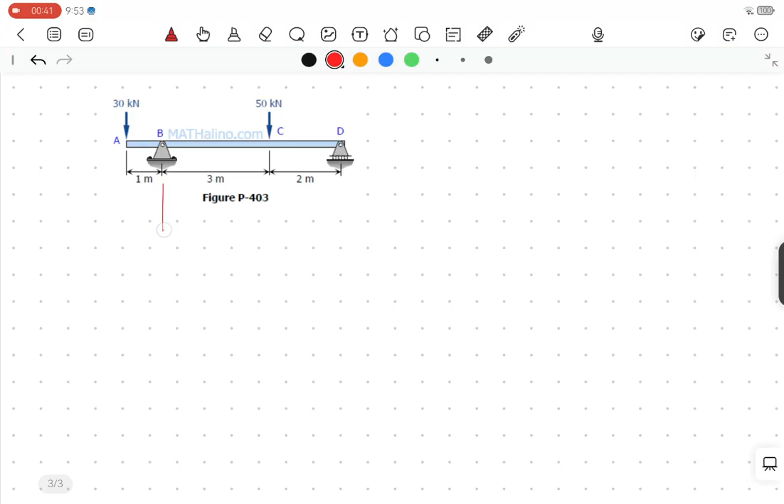First things first, what you need to do is identify the reactions. So there are reactions here and here. Let's call this RB, and let's call this RD.

I'll solve this in the easiest way possible. First, let's identify the loads, and the reactions. We need the summation of moment. You can choose either at B or at D. Let's try it at B. Moment at B.

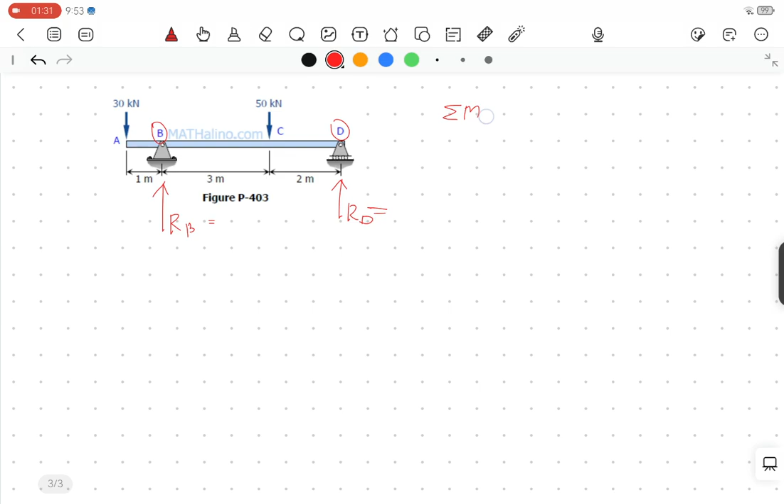I know you can take the moment anywhere, but here we'll just work through it. So moment at B. First, let's make an assumption that upward is positive and clockwise is positive.

Tip for you, if you're confused, always use this assumption. Even if the assumption turns out wrong, the answer will come out negative. So if the answer is negative, your assumption is wrong, and you just change it — no big deal.

Starting from A, the 30 has a moment arm of 1, and it will rotate at B. So it is counterclockwise, and since clockwise is positive, it is negative 30 times the moment arm, which is perpendicular to 30, which is 1 meter.

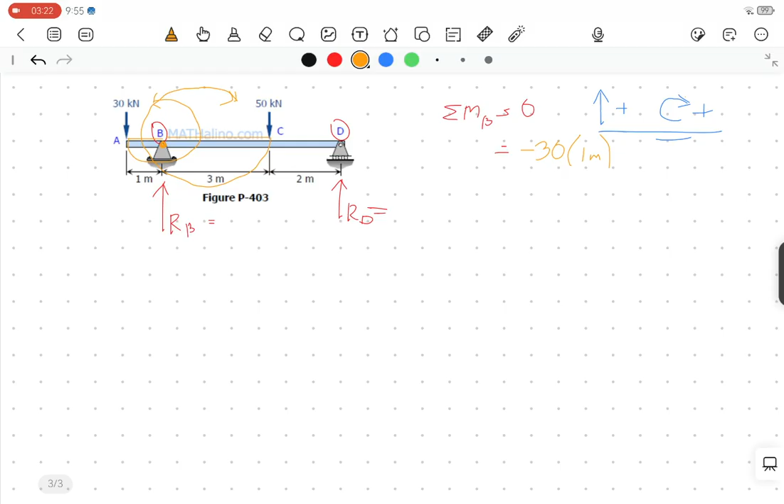Next is 50. Its moment arm, and the 50k will rotate here at B. Since we're taking the moment at B, it will rotate in that direction, which is positive. So positive 50 times 3.

Next, the one that will rotate is this, the RD. It will still rotate at B. So RD will rotate here, and it is in the counterclockwise direction, so it is negative RD times the moment arm, which is 3 plus 2, that is 5 — the length from D to B.

So solve for RD, which equals — you can solve this on your calculators in case I make a mistake — negative 30 times 1 plus 50 times 3 minus RD times 5 equals 0. It's 24.

So RD is 24. Next is summation of forces. Since only RB is left unknown, and all the vertical forces are given, we'll use summation of forces. We could use summation of moment, but for the easiest way, let's use summation of vertical forces.

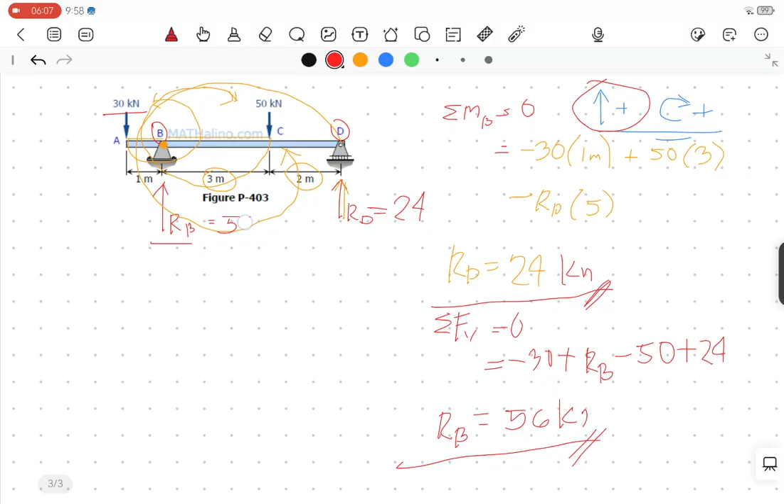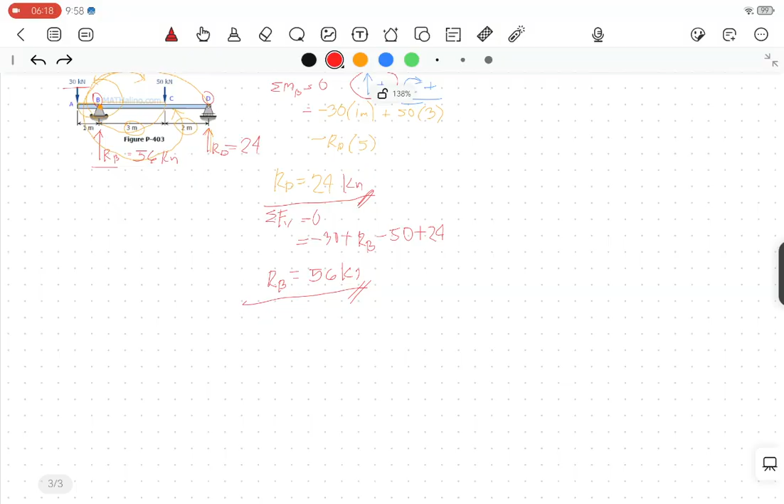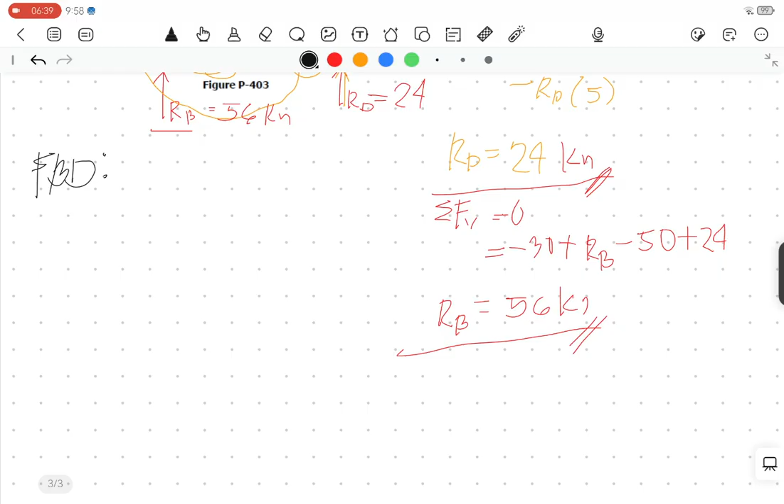So second, let's draw the — what do you call it — the FBD, the free body diagram. Our diagram will be quick and easy.

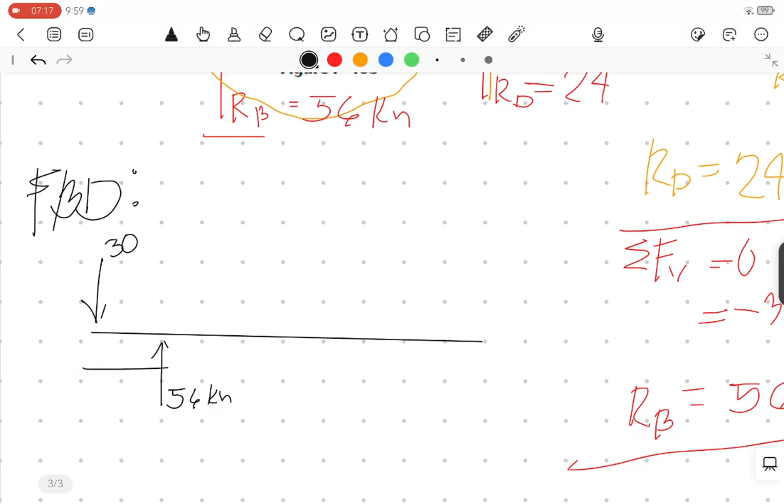So here we have 30 kN, and there's RB, which is 56, at 1 meter. Then there's 50 kN here, and the distance from here — we know it's 3 meters — and there's 24.

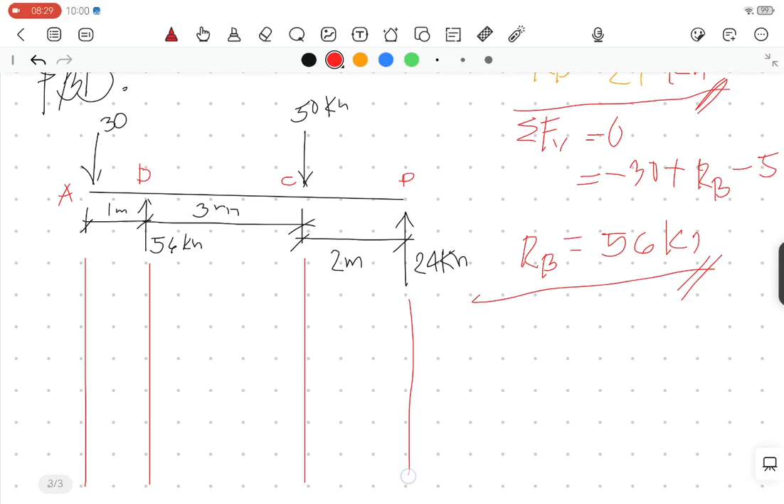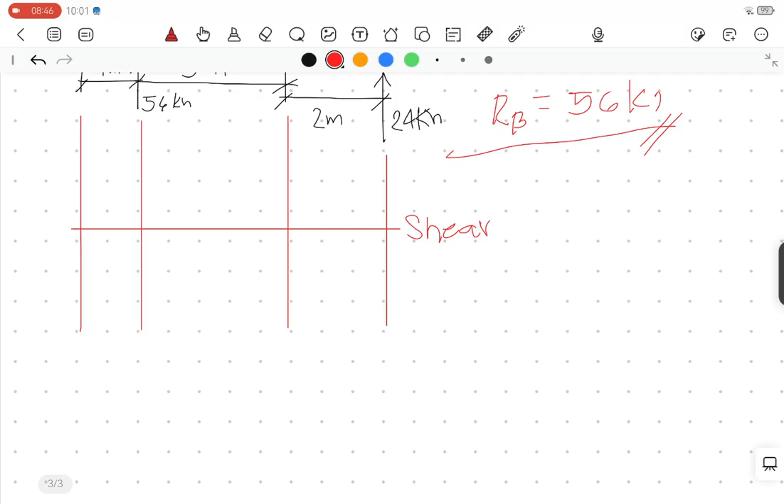Let's try this shear. Let's put here, solving for shear.

So here I'll explain the easiest way so it's easy to understand. So shear, or I call it V so I don't get confused, since it's vertical.

So VA, from left, I call that VA from left. If you draw a shear moment diagram, always look at your left. Look always at your left. Right? This is A. So left of this A, the left of this A.

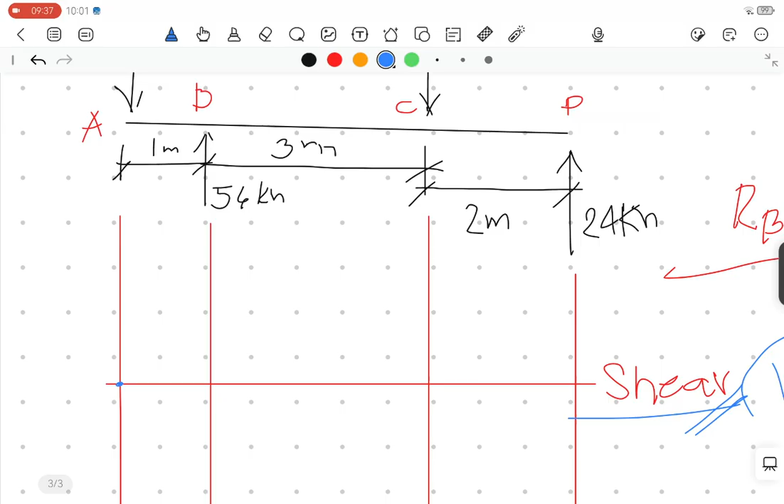Look here. If there are vertical forces. Are there vertical forces? None. So that's 0.

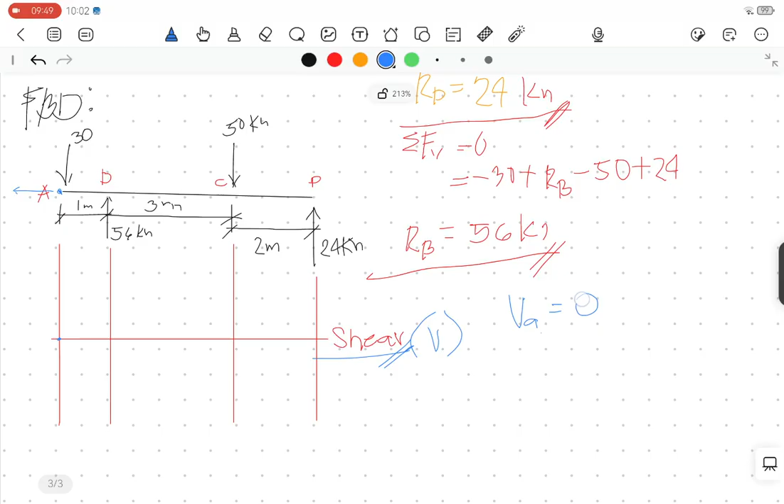So VA again. Look here, right there. Look at that. So now ask yourself then if there is a force acting. There is, which is 30.

But in downward position. What's our assumption? Upward positive. Guys, your assumption for the reaction must be the same as your assumption for your shear. So here it's negative 30.

So let's draw. So VA is 0, right? So we place VA as 0 first. Next is 30 downward. Your VA is 30. So here 30, which is negative 30. Then of course we draw.

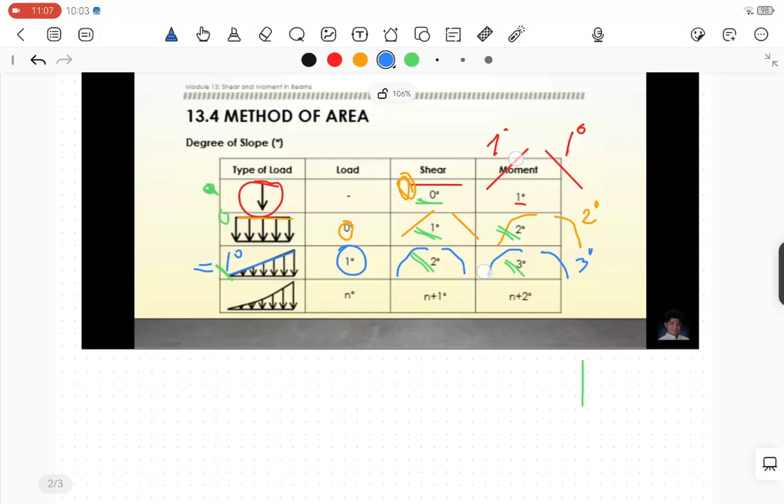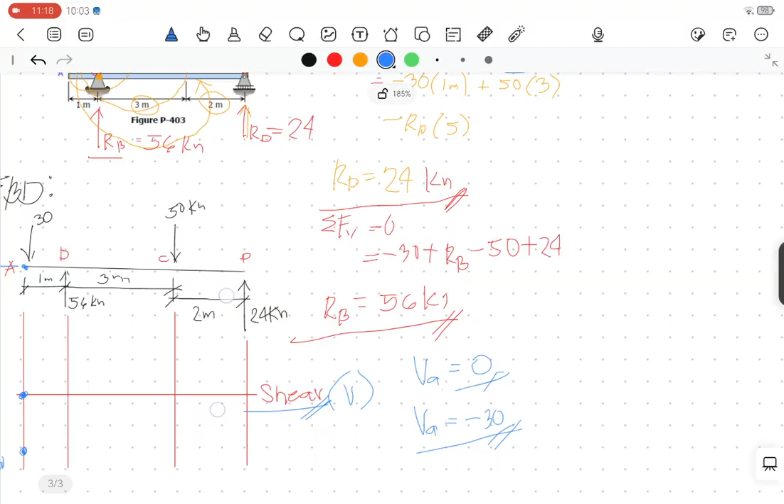Let's go back to our first lesson. Point load, we already did point load, and we're at shear. So that shear is like a straight line. Straight here. So the value here is still 30, negative 30. Why is it a straight line?

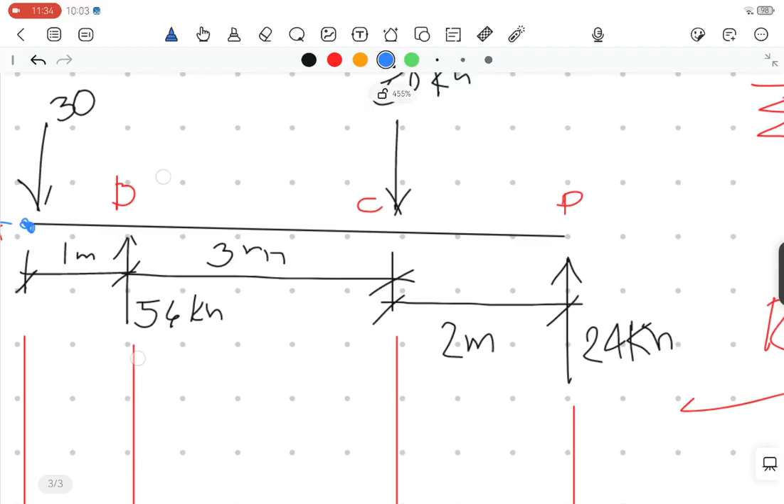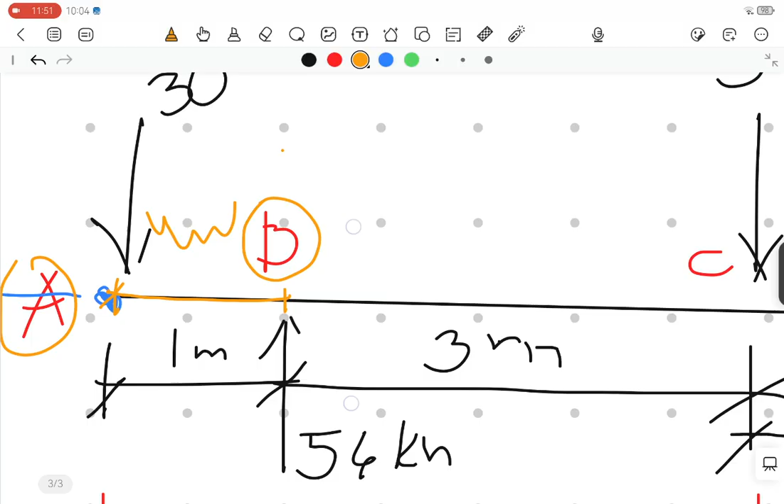Notice here, between A and B, between A and B, there are no other forces. No other forces. So your shear just transfers chill, transfers from A to B. So continue.

VB. So what's VB? Look at your left, the value from left, right? Which is 30. Value from left, which is 30. Which is this now. Here it is.

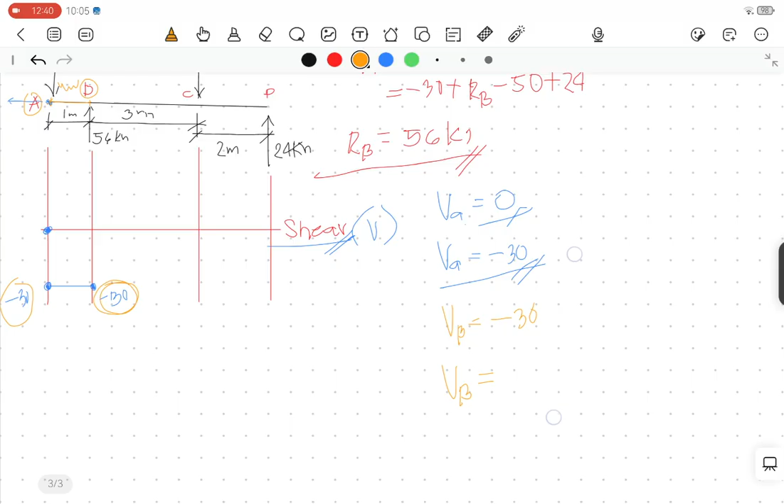Then VB again. This, for the sake of learning. And later on I'll teach you. So the easiest way to solve it. You can solve it like this. So again, VB from left, which is 30, is this. And VB in that position is this.

Ask yourself then, is there another force? So there's 56. So negative 30, 56 is in upward position. So plus 56.

You might ask, sir, why minus negative 30 plus 56? You know, here, your line must start here. At the B section, your line must start here. So from here, you go upward up to 56.

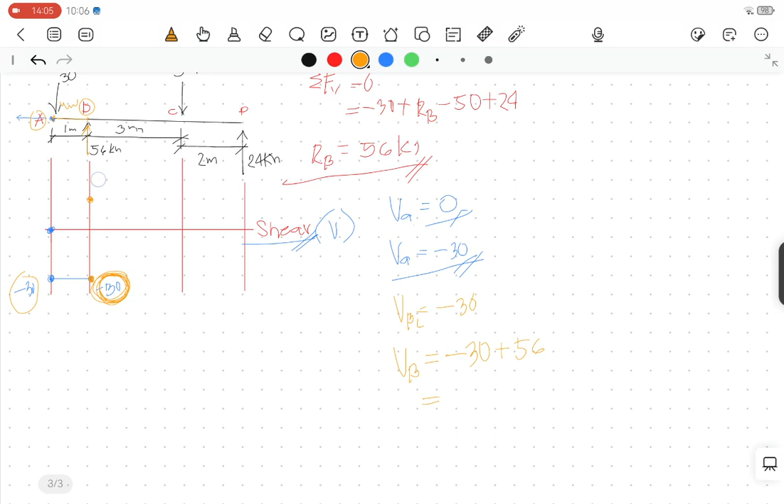So you solve it, which is negative 30 plus 56. So it's 26. And 26. 26. That's 26.

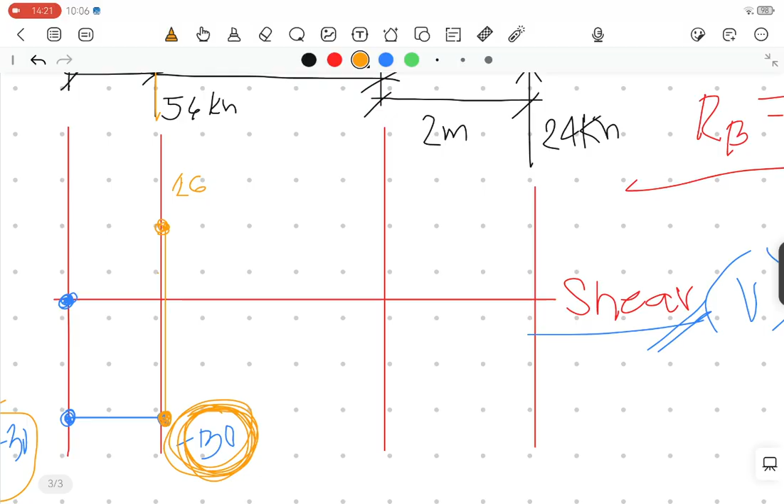It goes up. So next, VCL.

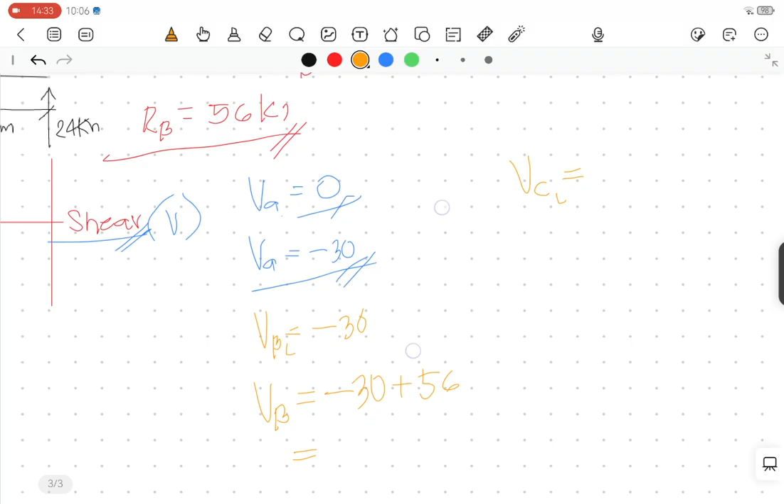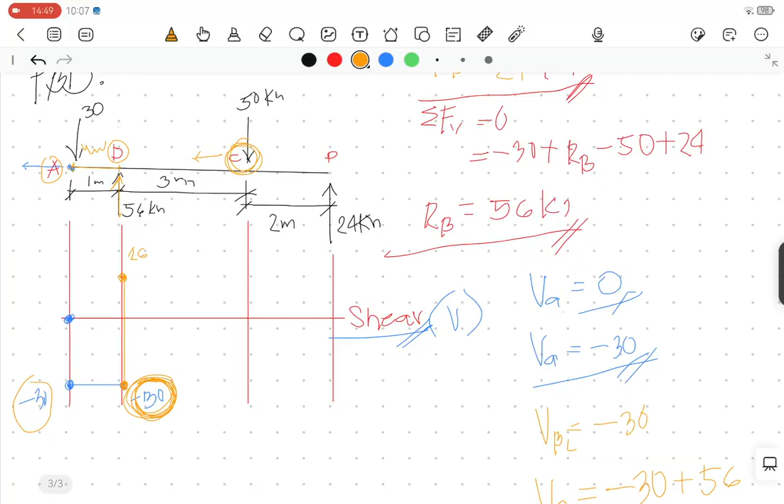So VC from left. So identify, focus here, look here and to its left. So you'll see the forces from left, right? Which is negative 30 and 56. And we know negative 30 and 56, 26 is this.

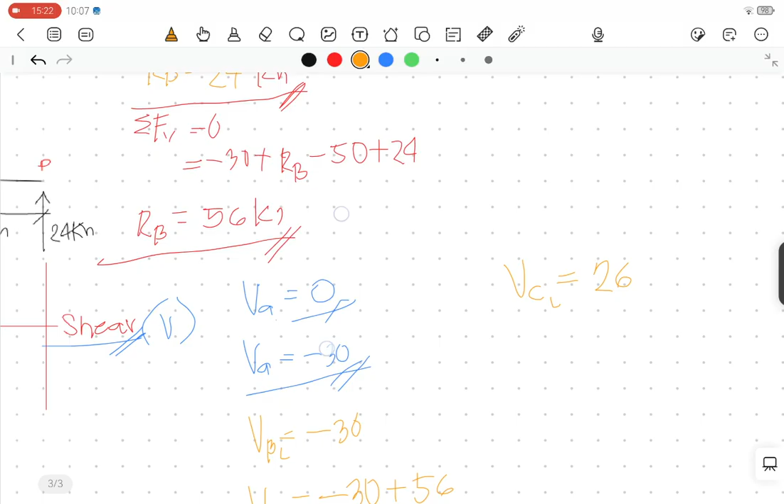We know this already, right? Focus here from left at C. We know that the left of C is negative 30 and 56. And we know their sum is 26. So this is 26. Right? Look, or you can rewrite it again as VCL negative 30 plus 56.

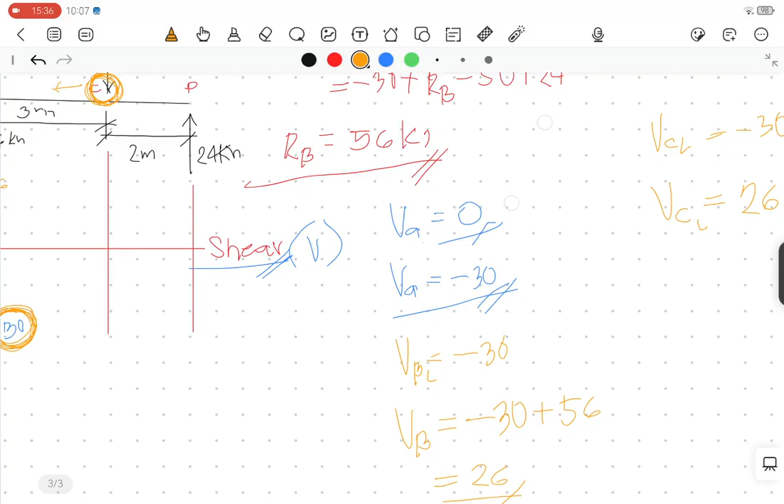So your answer is just 26. Right? So that's the value. So VC from that position here. This is VC here. So you add it. So 26.

Let's just draw this so it's not confusing. So negative 26, positive 26. So from 26, up to C, it's still 26, the value. Why 26?

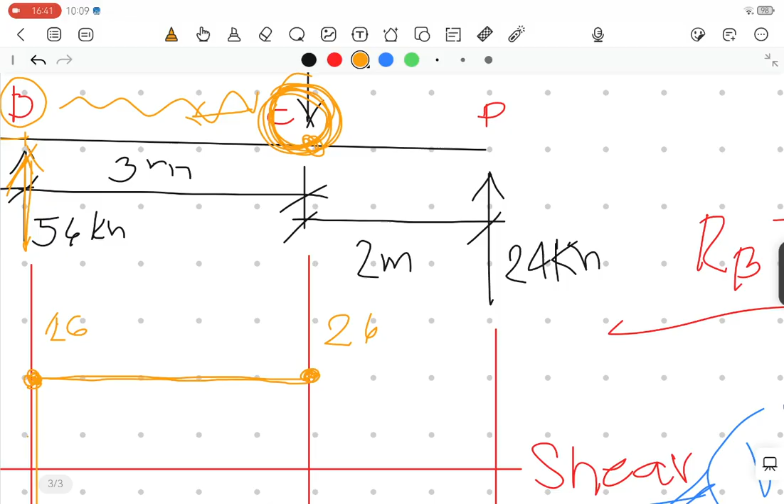Right, you see from B to C, there's no load acting here. Right? No load here. So the shear force from B to C is the same. And next is VC.

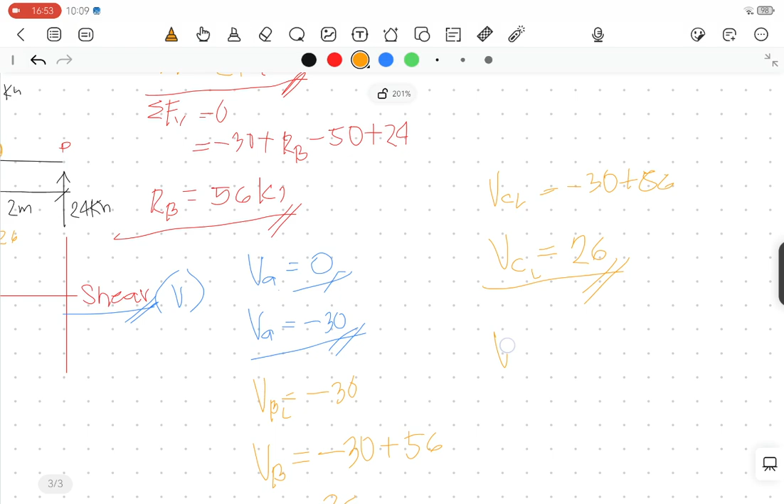At this point, don't look here. Look at another color too. Don't look at this, look at that.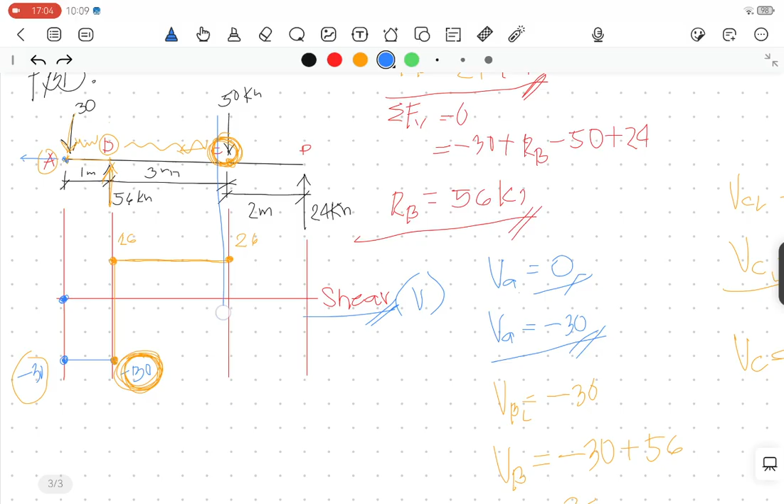So how many shear forces are there for VC? Aren't there two? This one is 26 and that one is 50. So the 50 is in negative position, downward, so it's negative 50 plus 26. How much is that? Negative 50 plus 26 is negative 24.

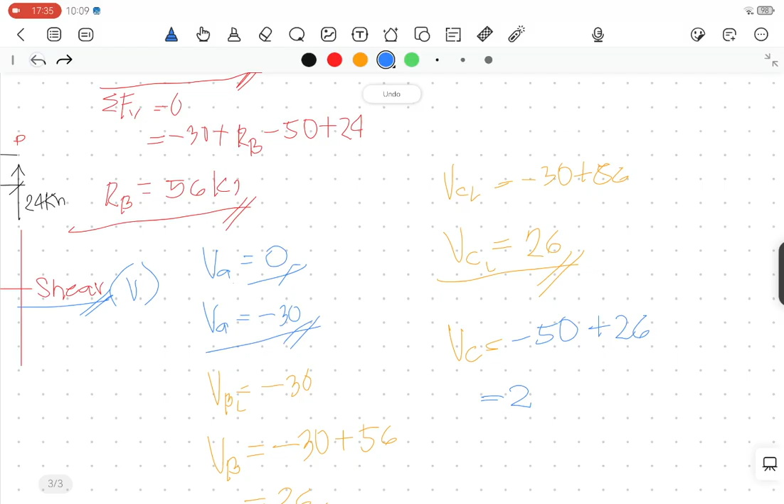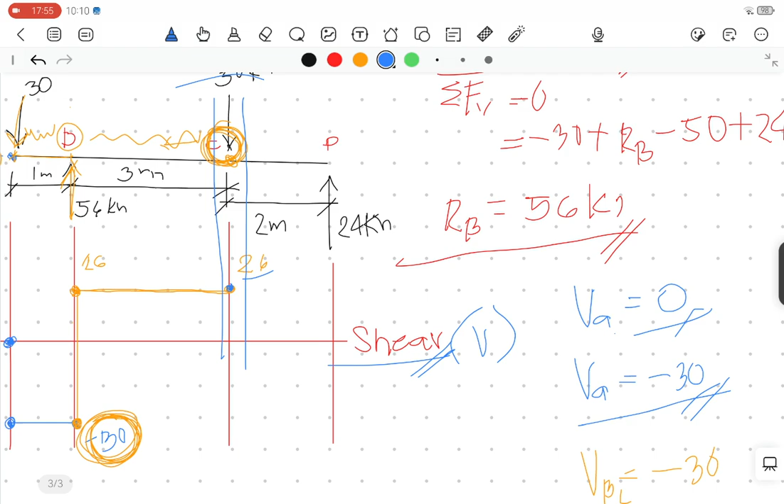26. Negative 24. So from here, the technique is: from here, 26, with the 50 pushing it down. So from 26, the 50 force pushes it, making it negative 24, since it's negative 50. So here it's negative 24, negative 24.

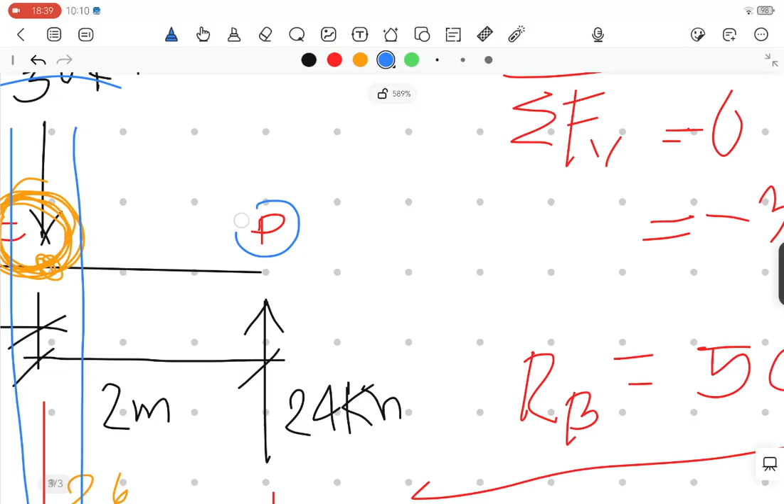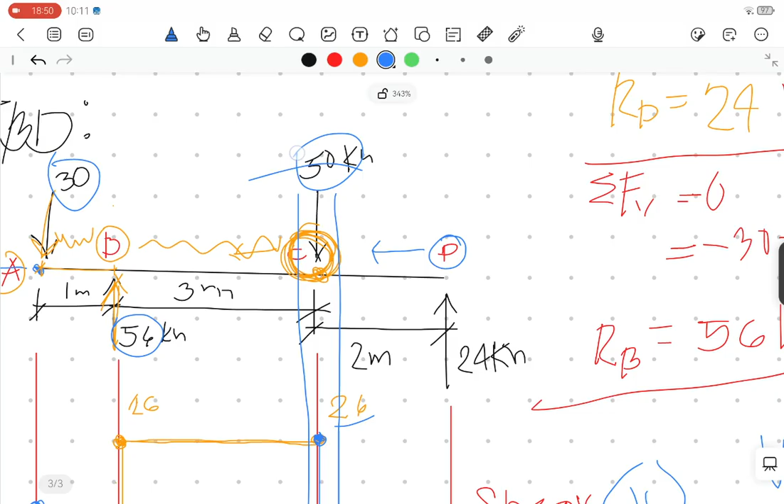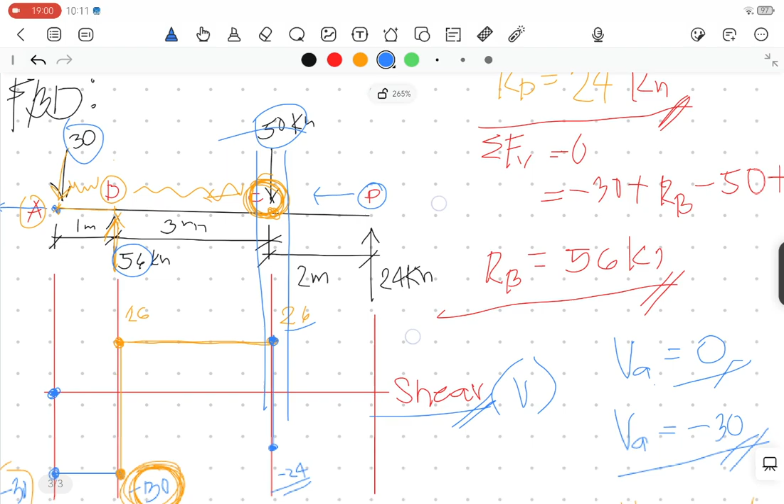So next, let's go to VD equals VDL. Let's focus on point D. So from the left side, look for the forces. It's 30, 56, and 50. If you add that - negative 30, positive 56, and negative 50 - you'll come up with the answer, negative 24, which is here.

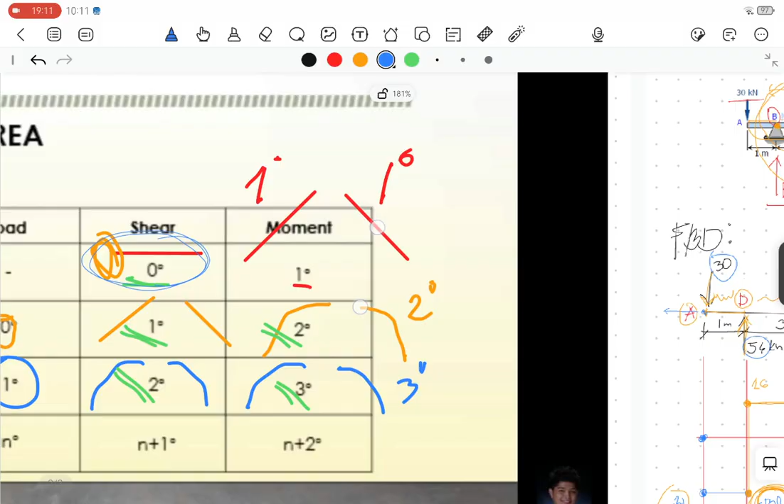Let's go back. So it's negative 30 plus 56 minus 50. Solve that: negative 30 plus 56 minus 50. That's negative 24. Negative 24.

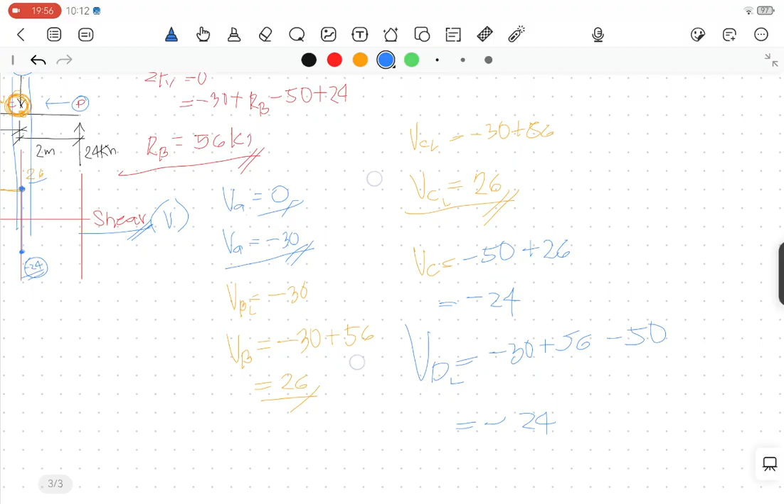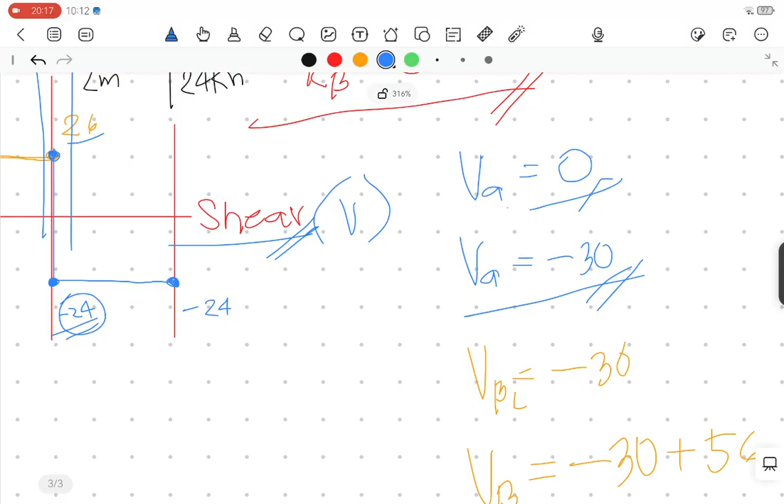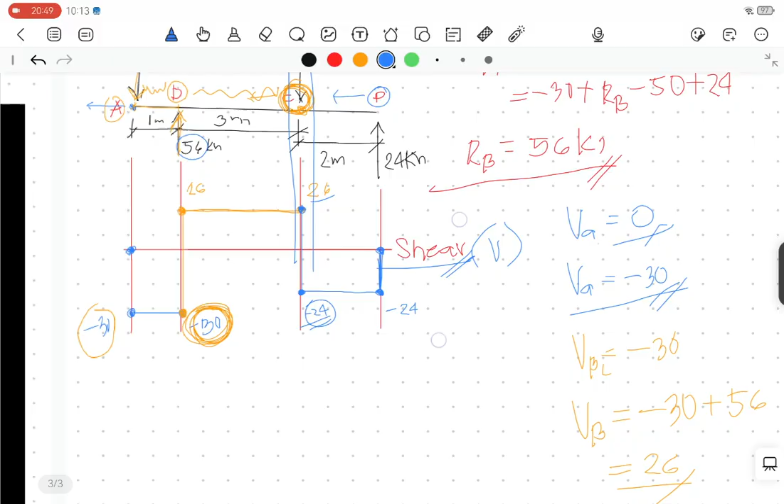So VD from the left is negative 24. Look from here to here, check. So it's negative 24. From negative 24, focus here and here. So it's VD: negative 24 plus 24, so it's 0. You'll know the answer is correct if you start from 0 and end up with 0, or else you made an error.

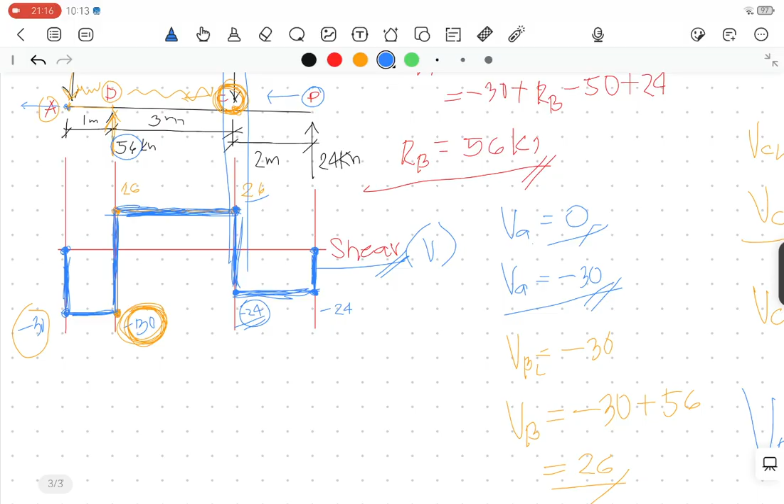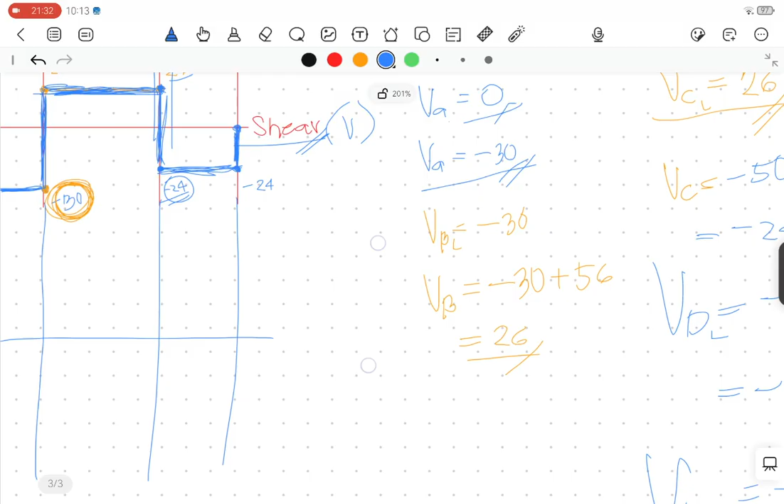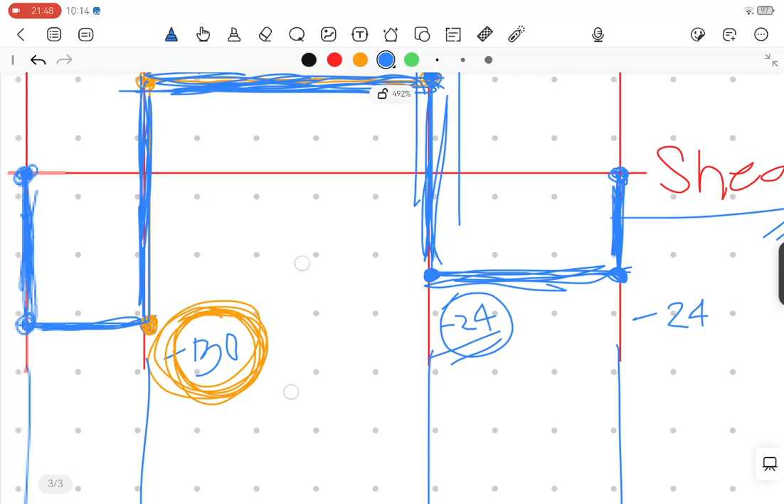So let's solve for the moment. Let's write this: Moment equals area. That's it. What does it mean? So here we have area 1, area 2, area 3.

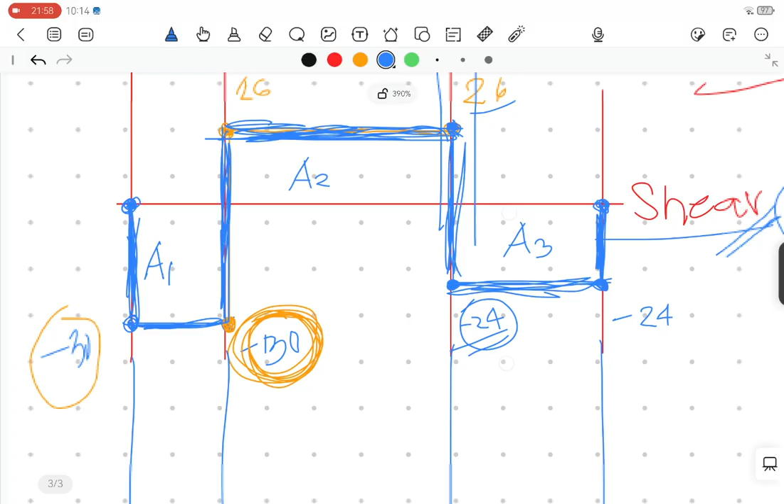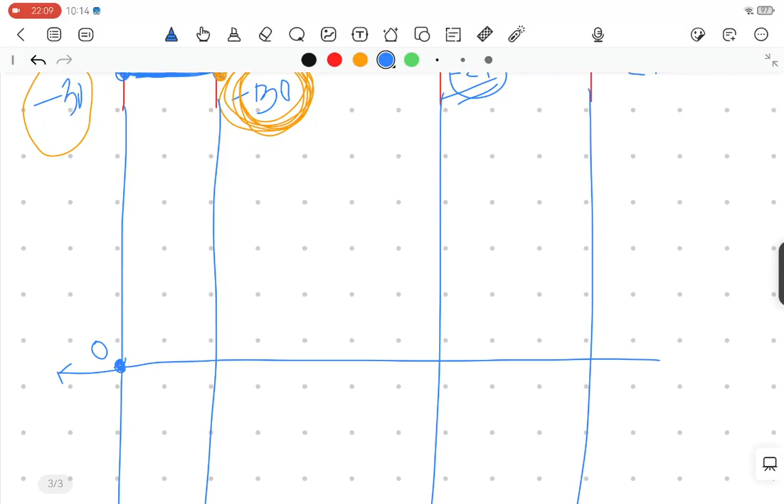So moment from the left is 0. From here to here, aren't there no forces? So that's 0, meaning there's no moment here - you'll see there's no moment there.

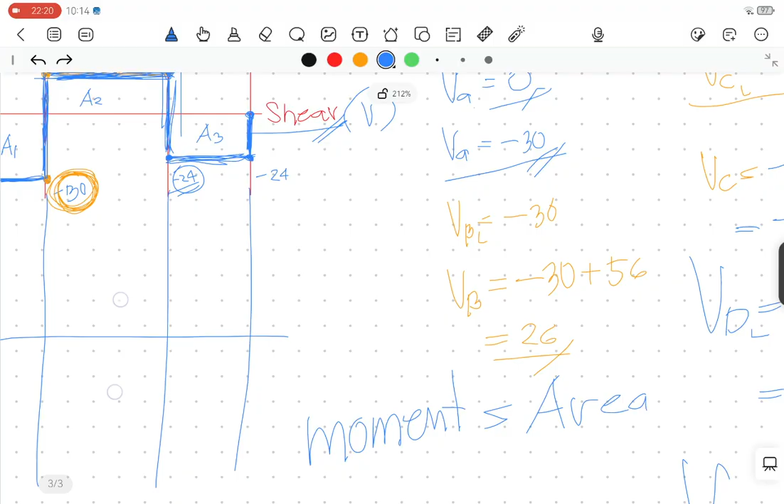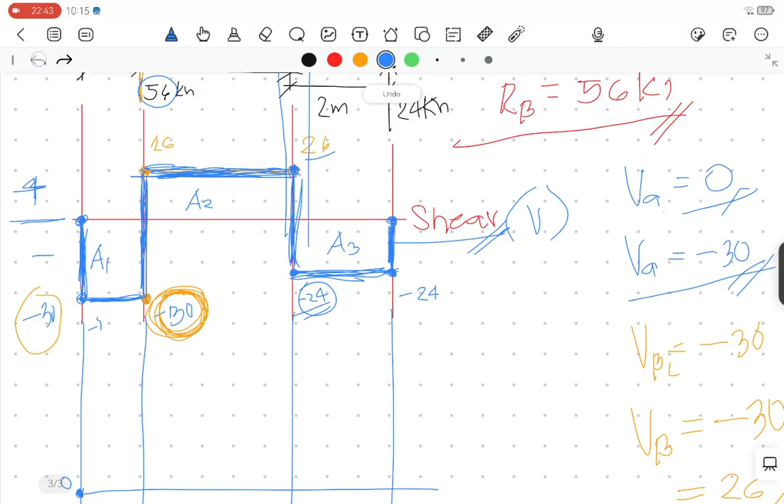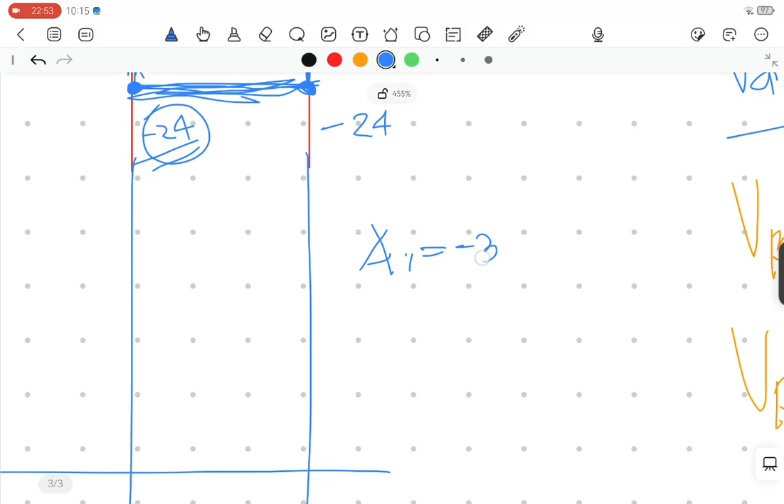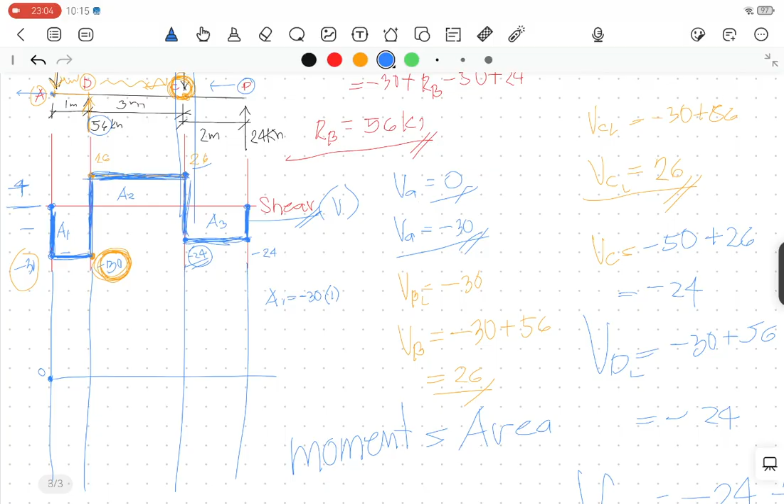So that's 0, and next is area 1. Area 1 is negative. First, this is our axis - this is negative and there is positive. So it's negative 30 times 1 - why? Length. Negative 30 times 1. Area like a square or rectangle, rectangle, is negative 30. Negative 30.

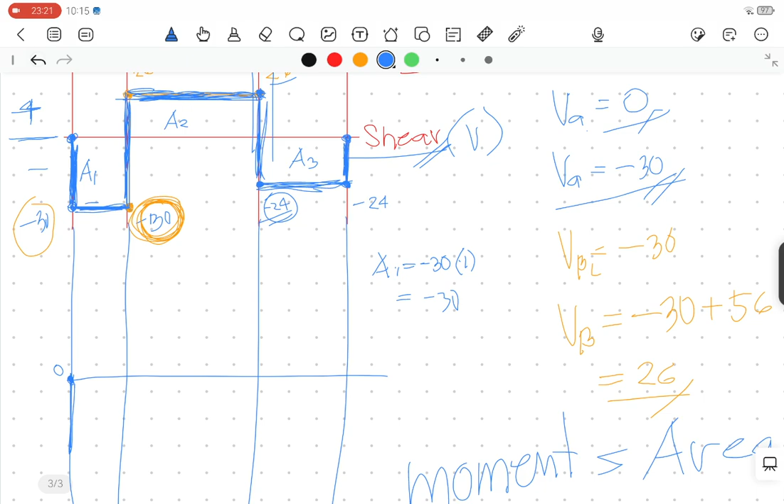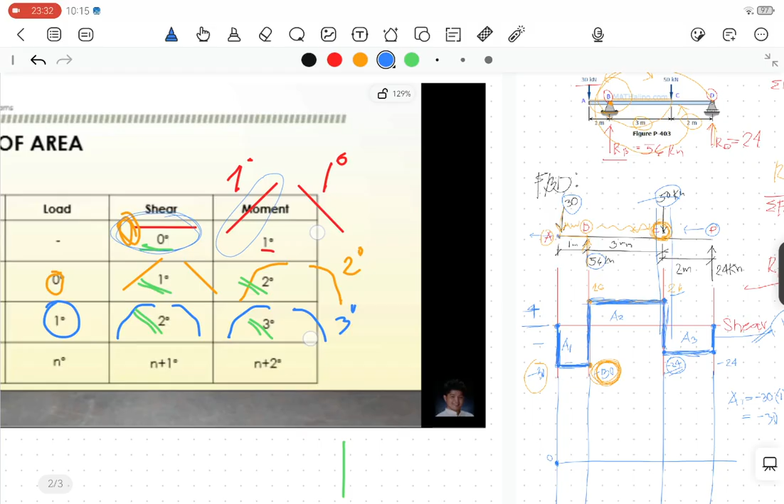So how do you graph it? Or maybe you'd go here? No, that's wrong. So according to our diagram, moment - look, it's basically from A to B only. From A to B, B to C, C to D, like that. Here, the answer is negative 30.

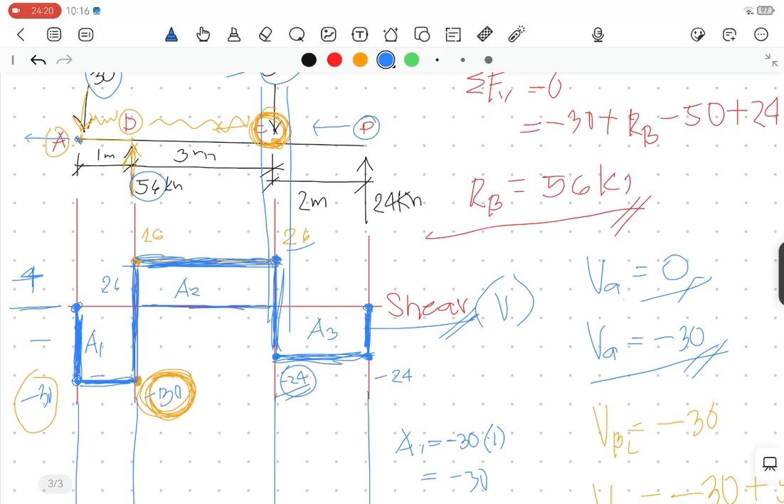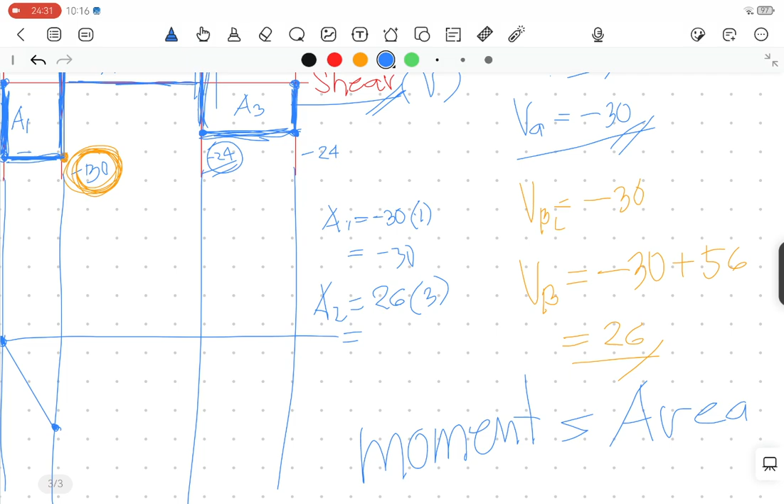So there, negative 30. Now area 2, let's solve area 2. It's not 26, be careful - you might solve it as 3 times 26. Make sure it's always 26 to 26. It's 26, so 26 times 3. 26 times 3, 26 times 3 is 78.

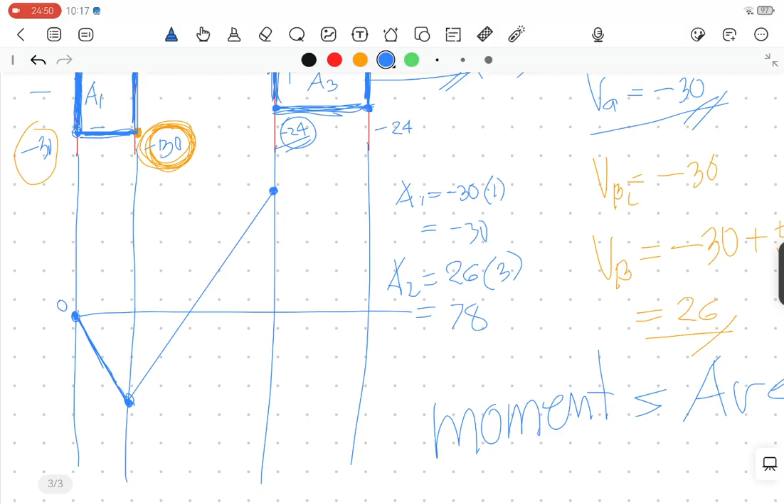78. So from B, from B to C is 78, which is positive. So basically it's here, 78. Next, let's erase this. The next is area 3: 24 times 2, which is negative 24. So it's 24 times 2, 48.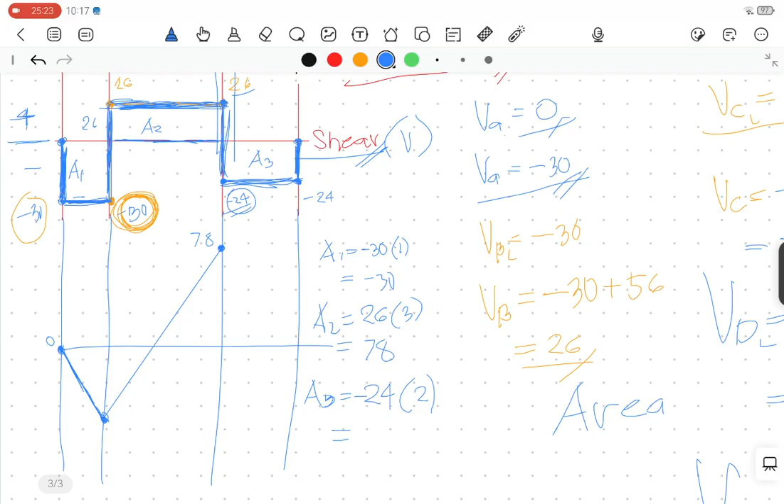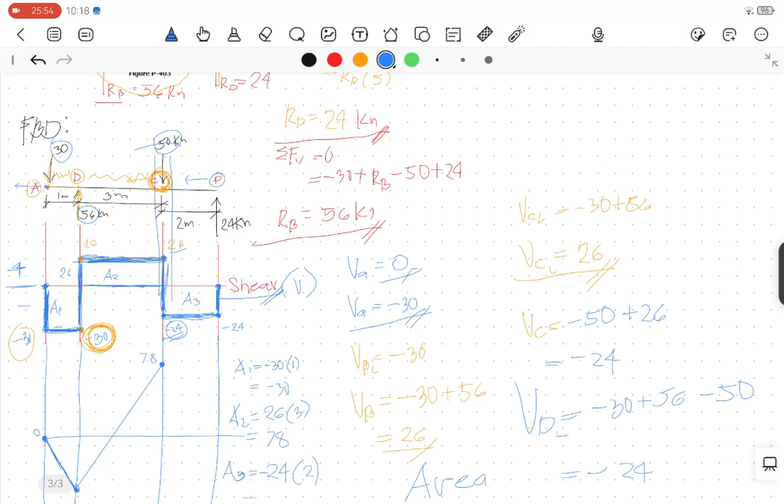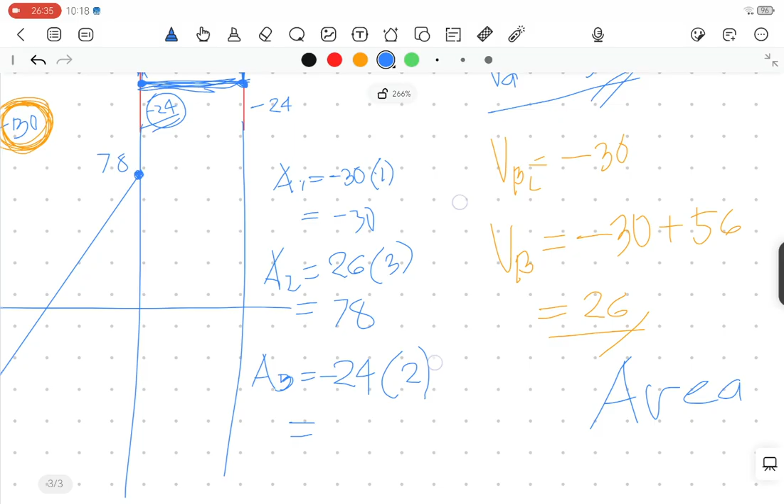It's wrong. Is this it? Continuing... Negative. Wait. Something's not right there. 26 times 3, area... oh, mistake. It's not 78. It's not 78, it's not 78. Okay, it's area 1.

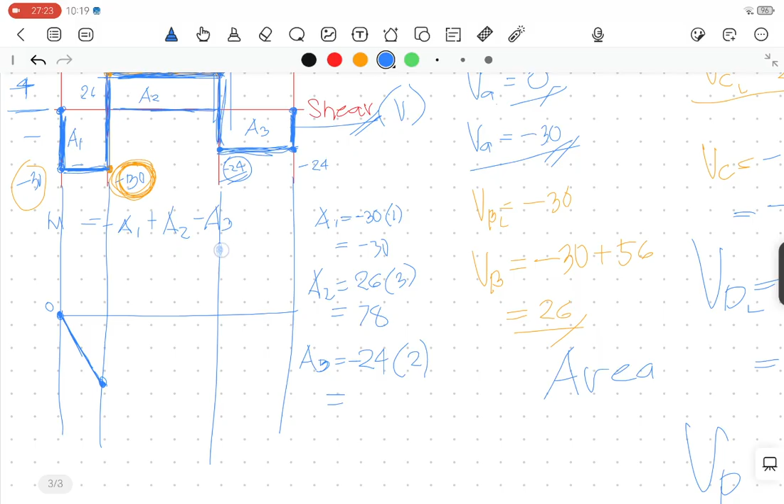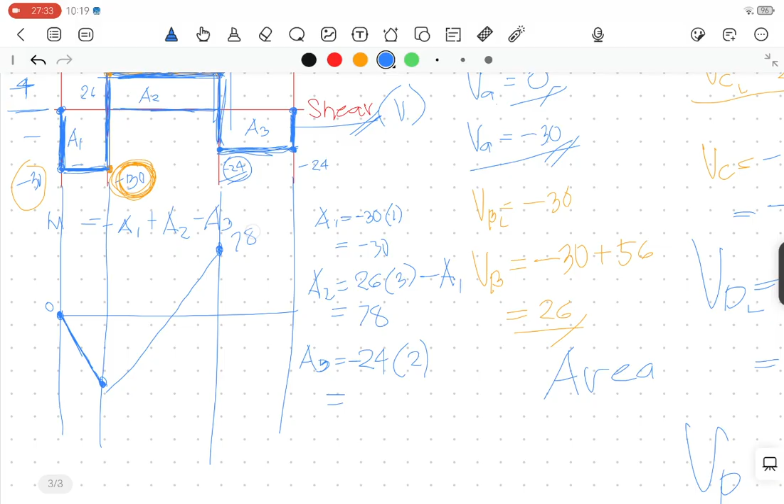So minus area 1, it's 78. So there it's 48 now. 48. So area 1, plus area 2, minus area 3, it's 48. It's 0... wait, that's 48. And it's 48, then so it's 0. So 0.

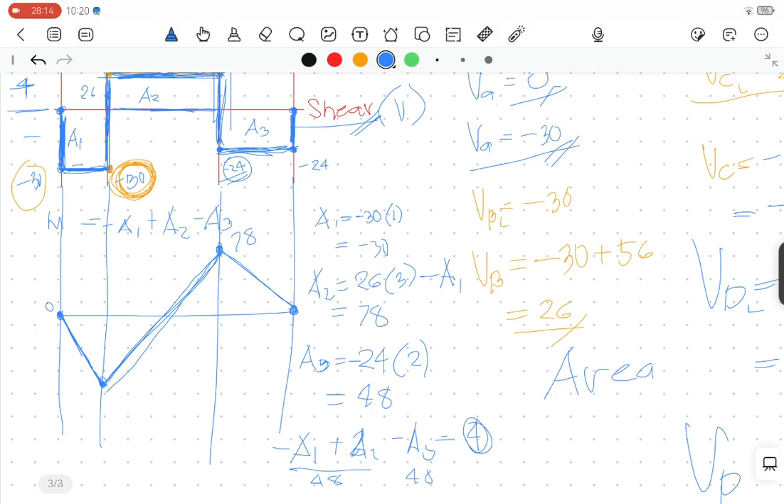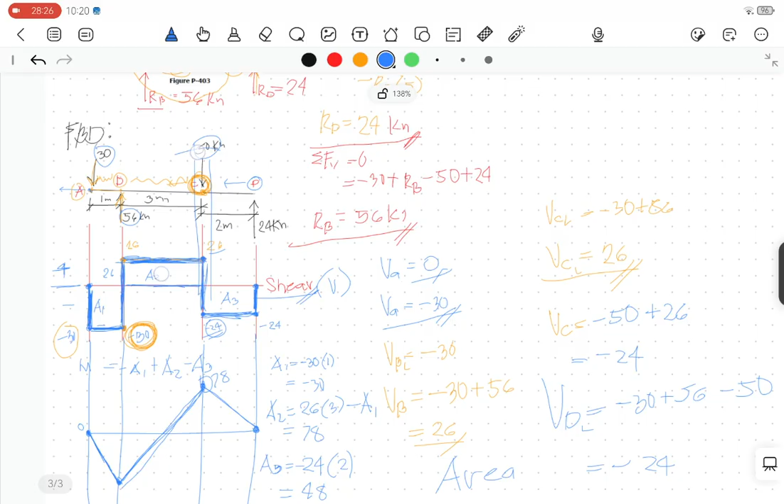So basically, this is your diagram, and your max moment is 78. That's it, about 30 minutes. In the next video, let's solve the same problem, but using the easiest way we can do it.